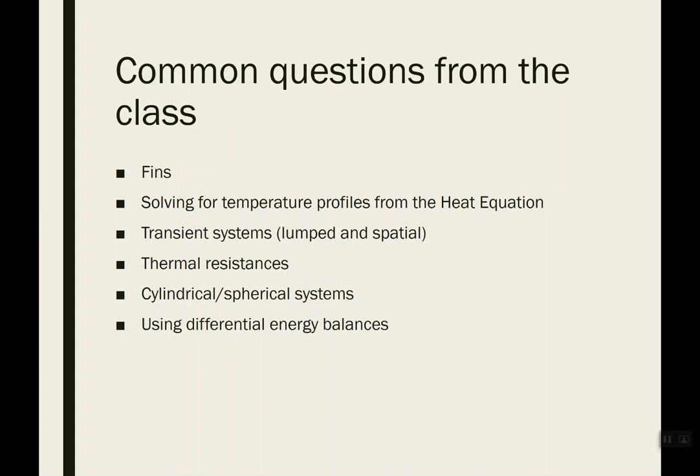There are certainly some other topics that we won't get to. I mean, it's hard to review everything in a single hour that we've been covering for the last 6 weeks. So no guarantees or promises. So today we're gonna spend doing a combination of reviewing concepts and solving problems. And in fact, we'll look at the problems first and then go back and think about the concepts that will help us solve that problem. So these are just example problems. They're by no means intended to be representative of everything that could potentially be on the exam.

Okay, so as I was searching through problems that would be representative of those topics that everyone asked about, I found that last year's conduction exam was a pretty good example. It was a hard exam, but it covered quite a bit of these topics. So we're going to first look at the 2018 exam, problem number 1.

Okay, so this was also a homework problem, right? Yeah. Okay, yeah. My research is optimization and efficiency, and so I frequently recycle old problems and stick them in the homework.

Okay, so a microchip with a bottom surface temperature of 344 Kelvin uses an array of fins to enhance heat transfer. The fins are square in shape, are insulated on their lower end, and have the dimensions specified in the figure below. The system is at steady state. So assuming a constant convection coefficient for all surfaces and a thermal conductivity of K equals 30 watts per meter Kelvin, how much heat does the array dissipate in watts under the conditions shown?

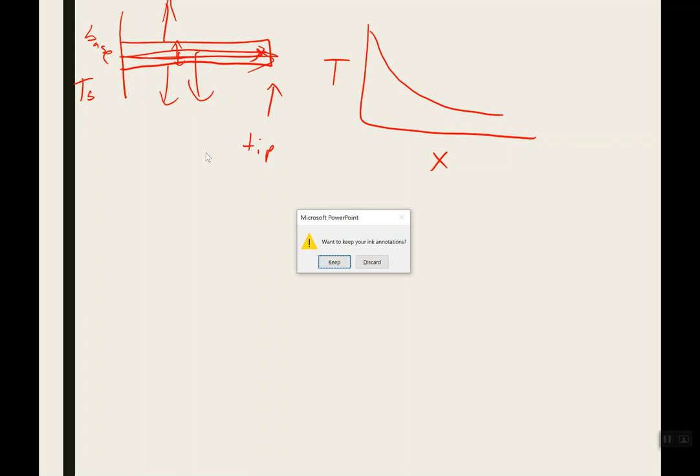So the book actually went through solving that thin fin equation for a number of different scenarios. Those scenarios all had to do with what's happening at the tip. So there was a tip condition. So here we could just remember that the solution to that thin fin equation for different scenarios are given in here. Let me go find this. Should I open this one?

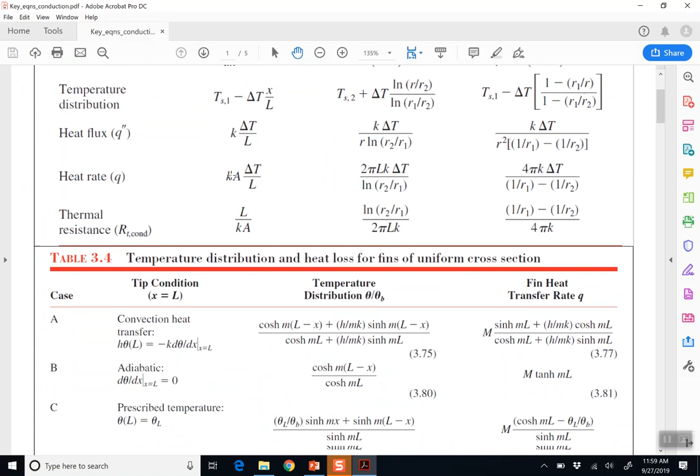Okay. So here you can go look up in the table. This is the actual sheet that you'll be given. So here are these different conditions. You could have convection happening from the tip. It could be adiabatic or insulated. It could be at a fixed temperature, or it could be infinitely long. So what's our tip condition for this particular problem?

So it's adiabatic. There is a specific reason I did that, because I'm asking you in this particular problem to get the total amount of heat dissipated by the entire array. So you would start by figuring out, assuming each fin is uniform, how much heat one individual fin dissipates. And where would we find that? Where would we find how much heat an individual fin dissipates?

Okay, yeah, it's right there. So in this case, when we have an adiabatic tip condition, we can get our temperature distribution here, and we can get our fin heat rate here. Remember the concept was that when you have a thin fin, you have something sticking out into space where temperature only varies in one dimension, but then it's losing heat by convection. Solving that differential equation leads us to this point.

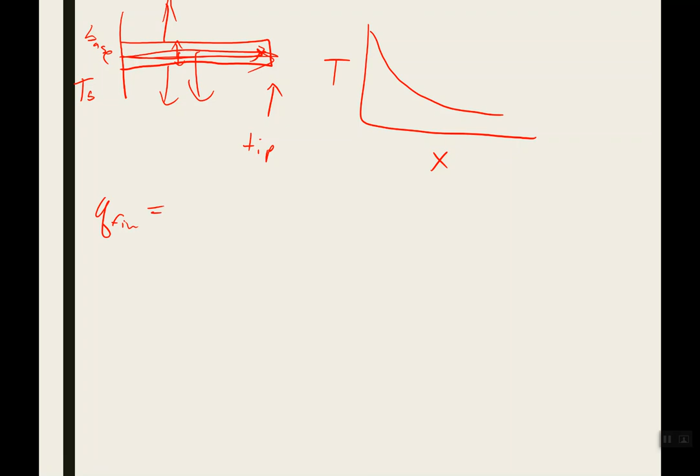Okay, so from here we would go and plug and chug. For an individual fin, we would use that equation that Q is equal to M times hyperbolic tangent of ML. You'd find the M and the L from that table, plug them in, and I'm going to skip all that in the interest of time. This is all available in the solutions that I've provided. 2.79 watts. Okay, so is that our answer? Why not?

Okay, so that's what one fin does, but this is an array of fins. So how would we calculate how much heat the entire array dissipates? Yeah, good point. We haven't quite gotten there yet. It means all the fins plus the remaining exposed base area. Okay, so how do we do that?

Let me just say before you freak out, I regret assigning this as a problem on the exam. Still a perfectly fine problem, but I'm not going this complex. But we're still doing this now because these concepts are still important.

So this would be the number of fins times the heat transfer rate for each fin. Then we would want to figure out how much heat is lost from the exposed base. So then we would have the area of the exposed base times h times T base minus T infinity.

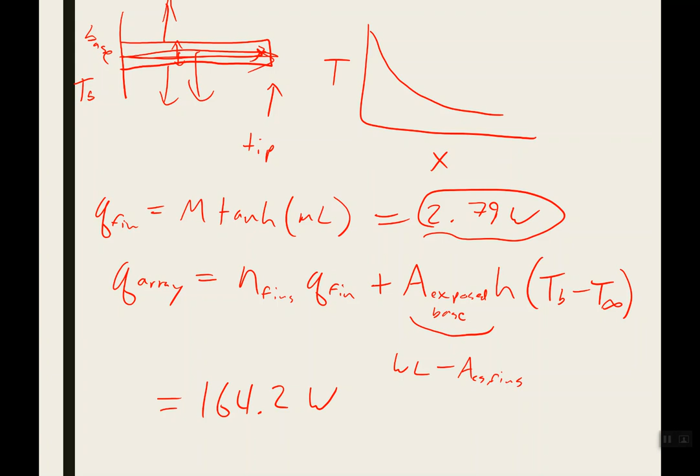Okay, so the second part of this problem is, what is the effectiveness of the array? So this is an important concept. What does the effectiveness mean?

Yeah, great, and it's actually in the problem. So the effectiveness of an array of fins is defined as the total amount of heat dissipated. So we get our total amount of heat, which was 164 watts, and then we need to figure out how much heat would be dissipated by a flat surface with no fin. So how would we figure that out? If we had no fins, how fast would this little area be losing heat?

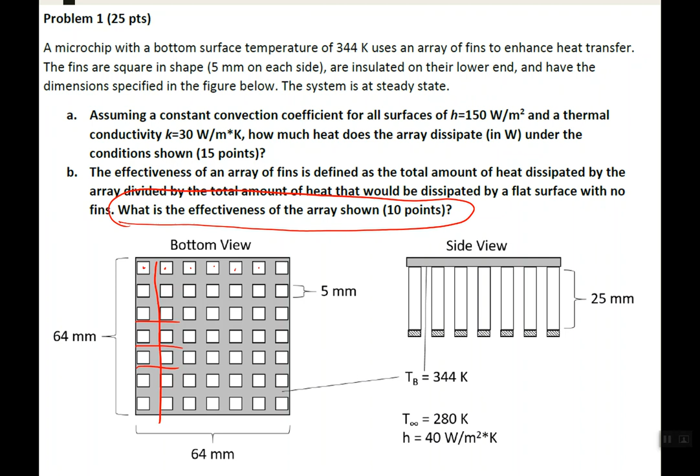What rate law would we use? Yeah, so our effectiveness of the fin is going to be this Q array, whatever I called that. Yeah, Q array divided by Q base if there were no fins. So Q base, so is this number going to be less than or equal to or greater than 1? It should be greater than 1, right? Because we're increasing the surface area.

So our Q base is going to be H A times the width. Well, sorry. A is the width times the length of the base, times TB minus T infinity. So this ends up being 4.18. So basically, having this array means that we dissipate 4.18 times the amount of heat that we would have dissipated if there were no array there.

So, does anyone remember what the efficiency means? That's another metric. Let's go back to just an individual fin. So we're done with this problem. Again, detailed numerical solutions are available on Canvas, but we're focusing on the concepts here. And they're not really that tricky of concepts. So if we wanted to look at the efficiency for a single fin, what is the efficiency of a single fin? How is that defined?

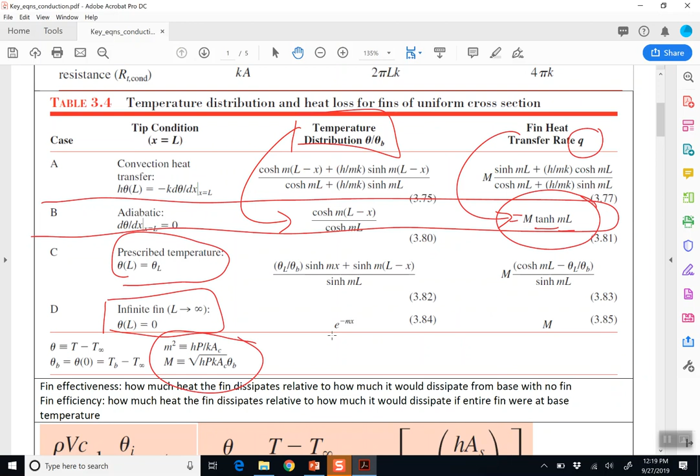However, these solutions in all three cases are given when your boundary conditions are constant surface temperatures. Those don't happen to match both of our boundary conditions. Yeah, Caleb? Does this also assume that the thermal conductivity K doesn't change with R? Yeah, it does. Okay, you'll just have to remember that. So this constant thermal conductivity would also apply here.

So this is the form of the equation that we're solving. I'm going to take you through actually integrating the heat equation and applying those specific boundary conditions. So what are our boundary conditions? Great. So at R equals R1, our temperature is just equal to T1. That temperature is just given to us. Great. And then keep going, sorry. I'm trying to get all this on the mic so people watching it later can hear. Okay, so then the other boundary condition, at R equals R2, T equals T2.

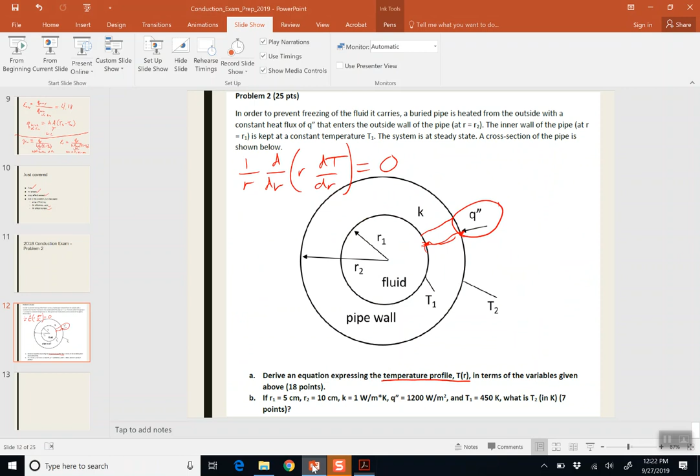So we're actually not given T2. And maybe I should have just left that off the problem. So our other boundary condition is actually going to be this flux condition. If our boundary conditions were just those two temperatures given, we could just go grab that equation directly. This would just be the solution. It would be as simple as that. But we actually don't know what T2 is. So we have this other flux boundary condition.

So we would start solving this problem. 1 over R, d by dr. Okay, so that equals 0. So we would start separating and integrating. Yeah, Donovan? So how would we write that boundary value for the flux at R2? Okay, we'll get there. Donovan's asking how would we write the flux boundary condition. So let's just get there. That'll be more helpful, I think, in the context of solving the problem.

Okay, so we could multiply both sides by R. Get rid of that guy. This just is 0. So then we would separate and integrate. So we would get the derivative of R times dT/dr is equal to 0 dr. So then we'd integrate, and we would get R times dT/dr is equal to just a constant of integration. The integral of 0 would just be a constant.

Okay, so now is a good time. Knowing that one of our boundary conditions is a flux boundary condition, we can now apply one of our boundary conditions. So to Donovan's question, we would have at R equals R2 our flux in the solid. If we had energy going by conduction this way, we could express that in terms of Fourier's law, and we could equate that flux to what's coming in, and actually we have energy coming this way.

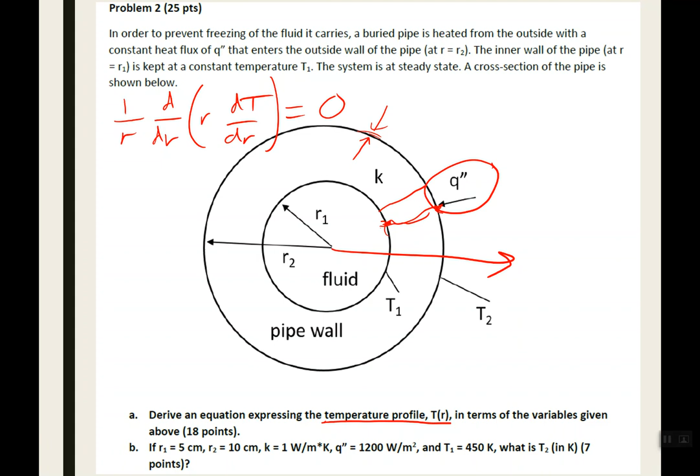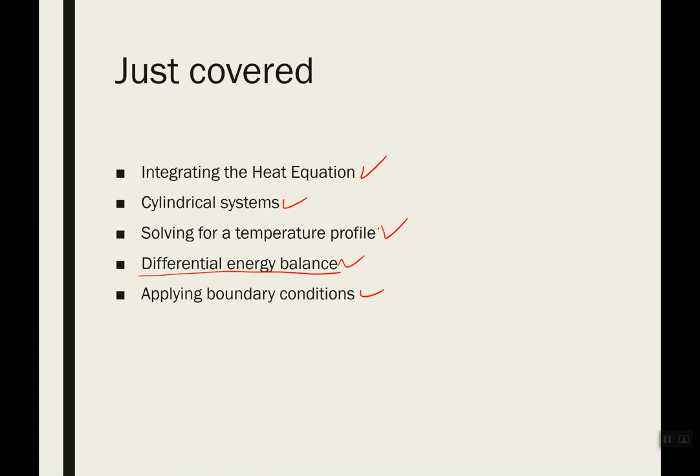Okay, I think we've got time for one last problem. Okay, well, so we just covered integrating the heat equation. There is definitely going to be one of these on your exam. We talked about cylindrical systems, solving for a temperature profile. There is a differential energy balance happening here; that's how we got the heat equation, that's how it was derived. So we didn't really cover that very specifically, but we certainly applied boundary conditions so that we could get our specific form of that temperature profile instead of just the general form. Any other questions?

Okay, so here's a different kind of question now, and I apologize that in the diagrams it's hard to distinguish between spheres and cylinders with my very rudimentary graphic design skills. So this is a sphere now. And carefully read these. I even italicized it just so it would be very clear that this is a sphere now. Okay, so a sphere of diameter d equals 1 centimeter generates heat uniformly and is encapsulated by an insulating shell that is 1 centimeter thick. The outer shell does not have a generation term and loses heat to the environment by convection. The process is at steady state, and key properties are found in the diagram below.

Okay, so first, part A, we want to find the outer surface temperature of the shell. So, stop and think about what the problem is asking for. So specifically, this problem is asking for one specific temperature. It's not asking for a temperature profile. So that kind of language probably means we don't need to worry about integrating the heat equation in this case. We just want to know the temperature on the outside, T2. Then the second part of this, we want to find the interface temperature, T1.

So I'd love to have someone suggest how they would tackle this problem. This one was a homework problem, I think. Yeah, Ivan, we haven't heard from you. Oh, okay. So first we have to find the total energy that's being generated. Okay. Generated. Then I would align it with the outside temperatures by knowing that that's going to be equal to the convection. Okay.

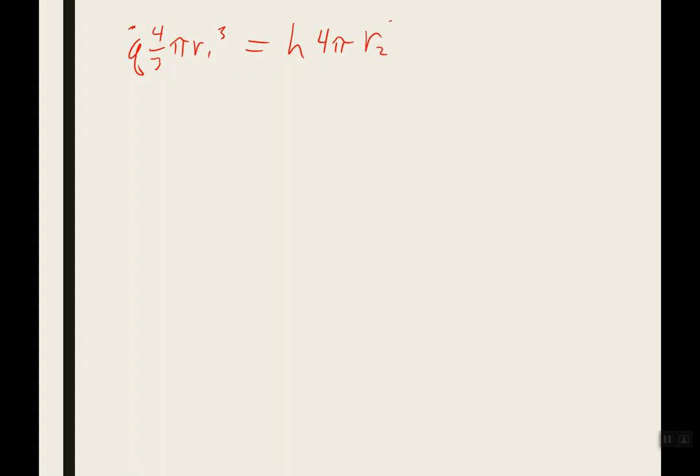Okay, so now we can compile these different terms of our energy balance. And we would just get Q dot times that inner volume. I'll be consistent here. Times 4/3 pi R1 cubed ends up being equal to H times 4 pi. This is the outer radius now. Okay, so that's our energy balance equation. What do we do with it at this point? Okay, solve for T2. So one equation, one unknown. We just solve for T2. Great.

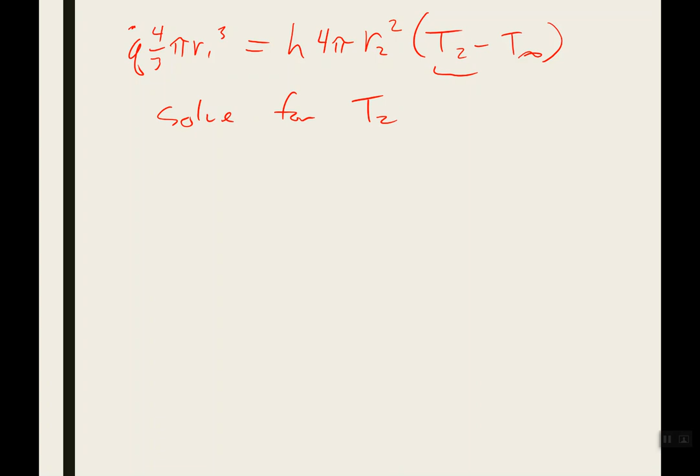Okay, so that gives us the answer to part A. Just a fairly simple energy balance, but taking that time, taking a deep breath, and just looking at your system carefully helps you to know, okay, where is it generating, where is it not generating, and make sure you get all the right variables in there.

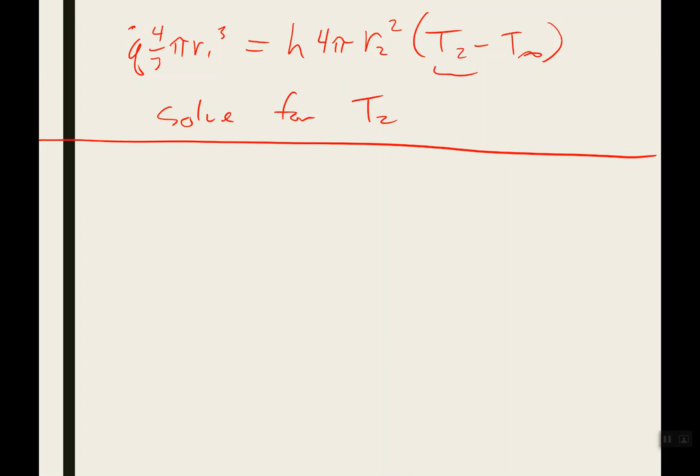Yeah, Ivan? So I was just making sure, the reason why we can say that the Q is equal to our convection loss was because of steady state, right? So the heat flux is constant throughout the entire thing. Is that what? The rate of heat, yeah.

So basically, let me reword what you were saying. Everything that's generated here, we have some reaction or some electric resistance that's generating heat, and that's got to go somewhere. So all that heat needs to be getting out somehow, and ultimately it's getting out of this outer boundary by convection. That's a really nice segue into part B. So now part B wants us to solve for T1, this other interface temperature. So how would we go about solving for T1 now?

So let's change our thought process now, so we can apply a different energy balance at this point. And so now if we apply an energy balance just here around this generating section, and sorry, I'll just do this here so we have the visualization still.

Isn't part B asking for a temperature distribution? Nope, it's just asking for T1. I don't know if that's too small to read. It says find the interface temperature between the generating sphere and the shell, and then T1 in parentheses. So we just want to find this interface temperature.

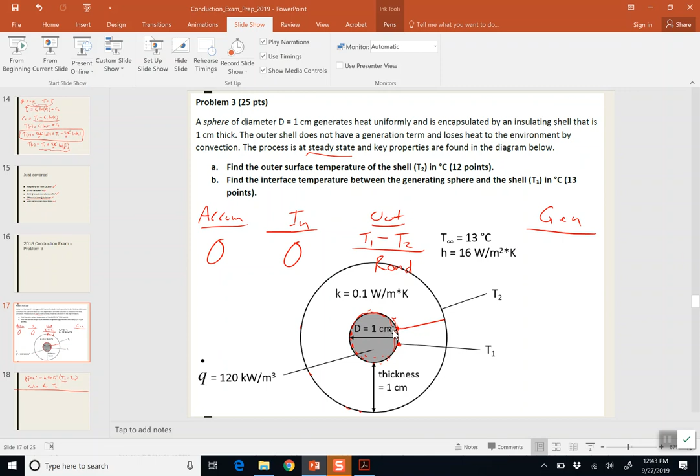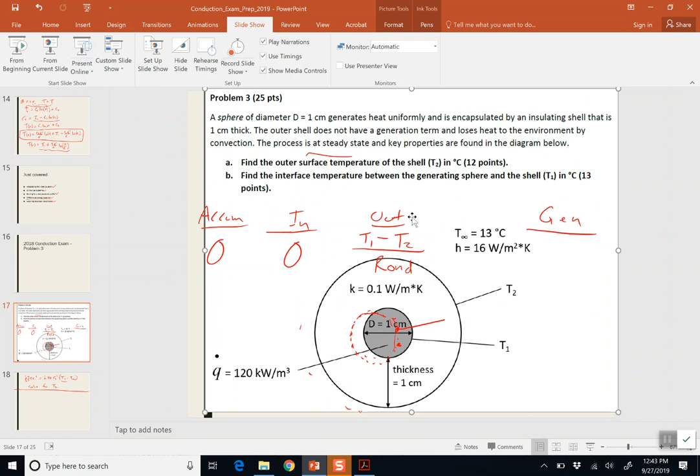Questions there? So we can do this, in this case, because we already solved for, whoa, how did I do that? Okay. We already solved for T2. So we already know what that is from the previous problem, so we can just look at what's happening between T1 and T2.

Could you also just use the resistance method when solving for B first and then solving for A, because if you did T1 minus T infinity and then included the resistance of the convection, you could solve for T1? Yeah, so you could also solve for T1 first. That's excellent. So another way, because all the heat is leaving this generation section and it's all getting out somehow. So we could also solve for this rate out here.

So our out term, T1 minus T2 over the conductive thermal resistance, would also be equal to T1 minus T infinity divided by our total thermal resistance, which is going to be R cond plus R conv. So when you have two thermal resistances in series, you can just add them up. So these two expressions are equivalent, and when you have heat propagating through multiple media in series, you can take a partial temperature difference divided by a partial thermal resistance, and that would be equivalent to the full temperature difference divided by the full thermal resistance. So there's a couple of different ways of doing that.

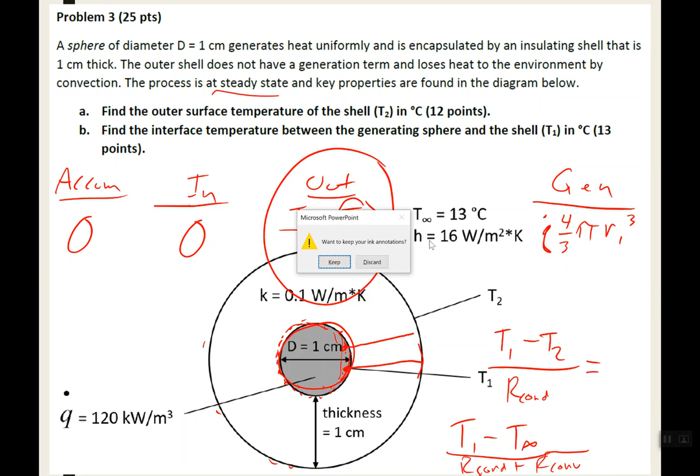Yep. Spherical resistance here, so this is the spherical resistance. Then the convective is going to be just the same. It's always 1 over hA, except your A changes because now it's a sphere instead of a cylinder or a plane wall.

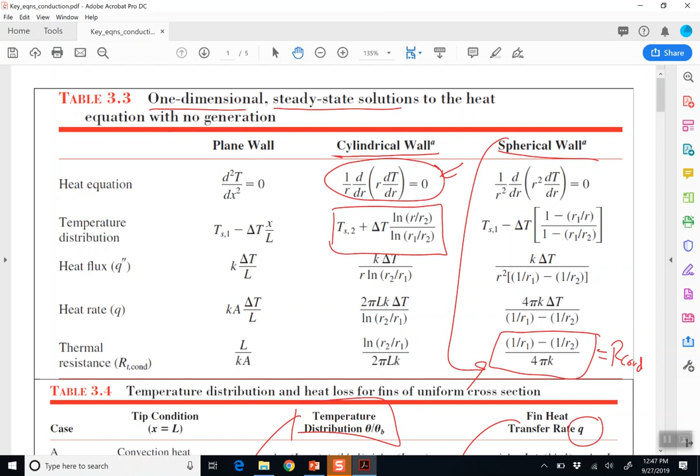Will we get this chart on the test, or should we just put it on our sheet? This chart is already on the test, yeah. You can actually download this whole sheet right now. It's on Canvas, and that's pretty much what you'll get on the test. Okay, thank you. So it's that one? I was just going to ask where the equation sheet was. Yep. On Canvas, I think I have a folder called Old Exams, and it's just in there. All right, great, thank you.